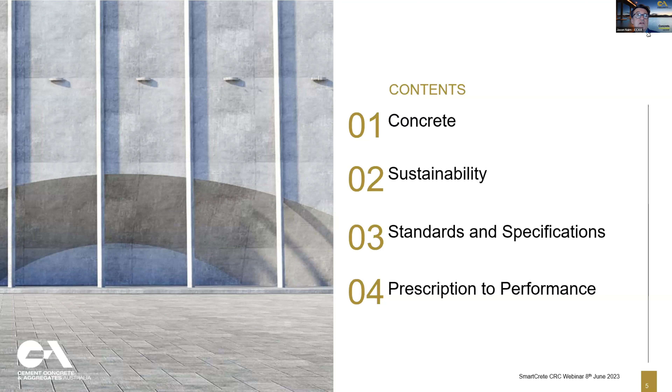So a quick chat about concrete - what is concrete, why are we interested in concrete from a sustainability point of view as well. A bit about the two key areas of interest for us in sustainability, which is circular economy and decarbonisation - two major ones. Let's talk about standard specifications - what's performance-based, what's prescriptive, and how do the two work together to form hybrids. Then a bit of a discussion about, from a concrete point of view, if we're going to provide performance-based alternatives into prescriptive specifications, what are the areas of interest. We're not going to come up with the research projects here or exactly the answers - it's really an awareness session about the specifications and standards and how they apply to concrete.

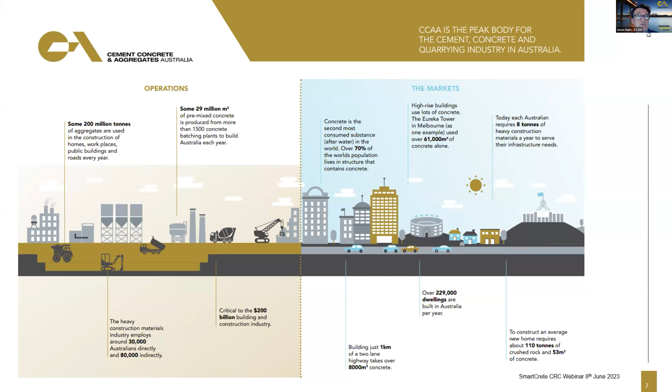All right, concrete - so our favourite material, it is the most popular, by volume at least, construction material used in the world. Around 29 million cubes used in premix concrete, at least in Australia, from around 1,500 batch plants. It's about 70 million tonnes of material, 10 million tonnes of cement, 55 million tonnes of aggregates, 3 million tonnes of SCMs, and a little bit of water to mix it all together.

As a result, we do use a lot of these materials. There's a really important focus on sustainability to ensure that we're using those resources efficiently and that we are minimising any of the impacts of extracting and using those resources.

The two areas of interest really for us - and I think you'd have to be living under a rock at the moment not to hear about circular economy or decarbonisation. From a circular economy point of view, we're very fortunate in our industry that while we do extract and use a lot of materials, we're not large waste generators. Nearly everything we take out, we use in making concrete, and somewhat we're a net consumer of waste from other industries. For example, we use about 3 million or so tonnes per year of supplementary cementitious materials that come from blast furnace waste products from iron blast furnaces or from coal burning power stations.

In a concrete plant, when we come back and wash the concrete trucks out, we capture that water and recycle it for making new concrete. From a quarry point of view, we take the quarry fines that would otherwise not have a market and transform that to produce manufactured fine aggregates or manufactured sand to replace otherwise natural sands. We also bring in a lot of aggregates from other industries such as air-cooled blast furnace slag, and there's a huge growing list of otherwise waste streams such as recycled crushed glass, where that glass can't be used to make new bottles - which is the real value - to be used as a replacement again for natural or manufactured sand.

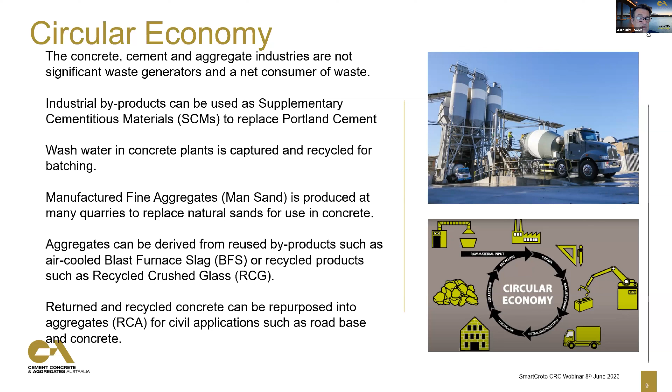But also concrete is 100% recyclable. We can reuse concrete at the end of its life to either make new concrete or to use in civil applications. So it is a great opportunity to improve that circular economy, and research and working with specifications and standards is the way to ensure that we're using these materials as best as possible, but with the lowest risk as well.

There's a lot of waste materials that are used, really supported by end-of-waste codes or resource recovery codes in New South Wales, supported by standards and specifications, including testing and guides and handbooks. There's been a lot of work over many years to encourage the use of waste materials to replace virgin materials, and that continues now.

For example, Austroads have undertaken work recently around recycled crushed glass. They produced a guide for how you process glass fines to produce an RCG, or recycled crushed glass, suitable for construction use and a range of applications. They've also got a specification that tells you the quality requirements for the RCG to be used in different applications. Once you have those things, you know how to make it, you know what you've made, and you've got a guideline for consistency.

These specifications provide consistency. You can then undertake desktop, lab and field trials to develop and demonstrate the use, and finally make sure those materials are incorporated into our standards and specifications. Again, it's all performance-based. If you've got RCG as an alternative aggregate and a performance-based standard for making concrete, then the thing works really well together.

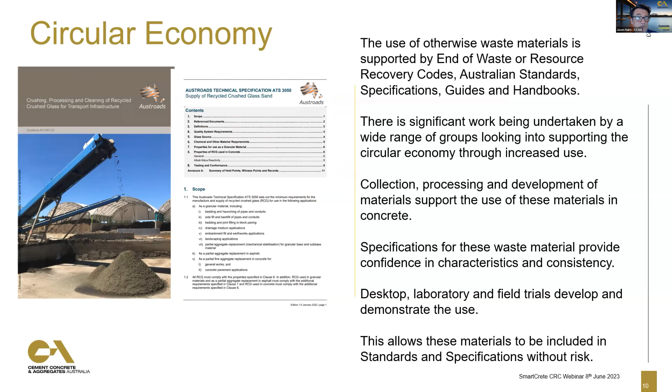The other area of interest for our industry is decarbonisation. People should know that the cement and concrete industry is responsible for a large percentage of anthropogenic CO2 emissions, and we've got a very strong ambition to reduce that CO2 footprint as quickly as possible, with a target of net zero by 2050.

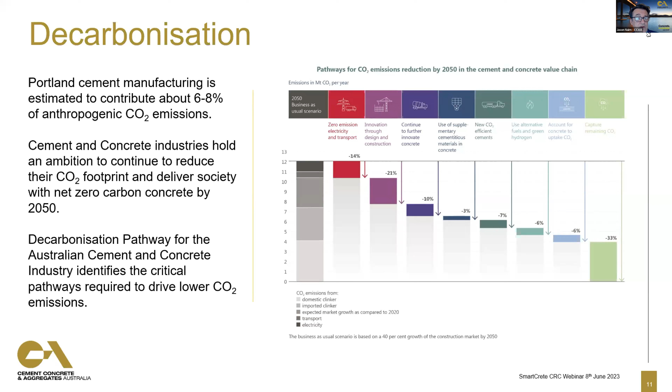As a result, there was a pathways document, Decarbonisation Pathways for the Australian Cement and Concrete Industry, produced at the end of 2021 in combination with Smartcrete, CIF, ourselves and others. That comes up with 8 pathways which all work together in parallel to get to net zero by 2050.

From a concrete manufacture, supply and use point of view, there are really only 4 pathways that act in this area. The other ones are about making clinker or electricity use, and about carbonation. These 4 are about the way we design and construct things, the way we make the concrete, and the materials we use, the SCMs and cements inside those concretes.

Together those 4 pathways give about a 41% reduction of CO2 at the 2050 position, but will continuously progress from now to that 41%. When you look at those pathways, there are a lot of individual things happening in design method, structural optimisation, using less materials, and changing the way we assess and test the concrete product.

We're going from 28 days to, say, 56 days where appropriate. Changing the construction technologies to use things like going from cast-in-situ to precast, or from pumped concrete to another way of delivering concrete.

Reducing waste is important. Extending the life of the structures is important. Repairing those structures, reusing those structures, and then all the things about the cement.

So you're looking at maximising traditional use of SCMs, but also looking at the new ones available, looking at reducing cement content, new alternative binders, both non-Portland cement ones and some new CO2-efficient cements. These are the things in those 4 areas, or a shortlist at least, that all rely upon changes to specifications and standards to enable them to be delivered.

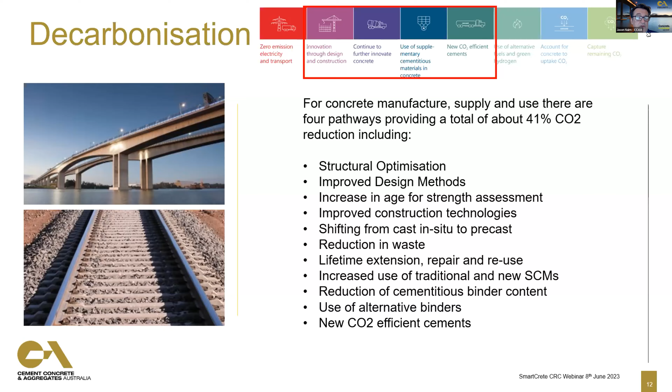So everybody knows concrete - it's very durable, very strong, very energy efficient, low cost. That's why we use a lot of it. And our structures are typically designed for a long life, 50 to 100 years.

But the standards and specifications we have are really important to make sure our design requirements, the structures we make, meet all the in-service requirements and last for this long design life, the long service life. But there are opportunities in the standards and specs to further support the circular economy and support decarbonisation as well.

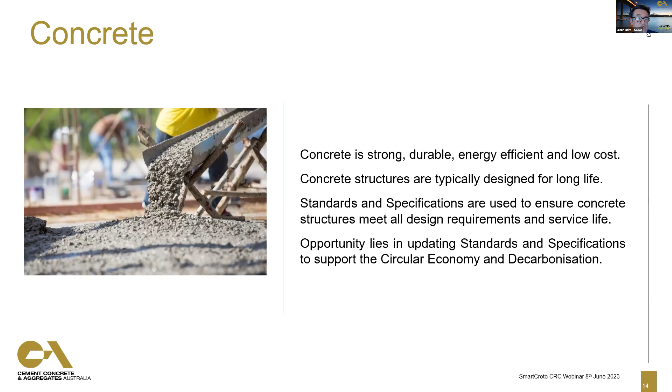When we look at standards and specs from a concrete point of view, these provide requirements for raw materials, about the mix designs, what proportions of these materials you need in those concrete designs, about the concrete properties you want, plastic and hardened properties, the methods of construction, and overlying all of these things is the testing as well.

Standards are also supported by specifications and codes. For instance, the National Construction Code is fully supported by a set of design standards, which is supported by a set of material standards, which is supported by a set of testing standards.

Standards and specs can be prescriptive, where they say this is exactly how you do it, or they can be performance-based, where they say this is what we want at the end and it's up to you to decide how to deliver that. But in reality, all standards and specs are somewhat hybrid - they all have a little bit of prescriptive and a little performance, and the balance can change depending on which standard or spec you're talking about.

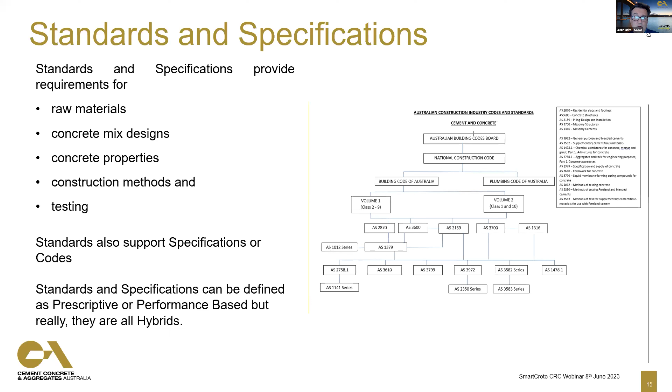Prescriptive specifications from a concrete point of view are really intended to deliver the required performance. These are typically based on history or experience and knowledge, and they do limit or specify the types of materials that can be used.

That can be a limitation in regards to looking at new recycled material sources. They can limit the proportions of the materials in the concrete mixes, and that can set minimum cement contents and therefore have an effect on our strategies to decarbonise. They can set plastic properties of the concrete, slump or slump flow ranges, air contents. You can have test methods that are in there, and also the final properties.

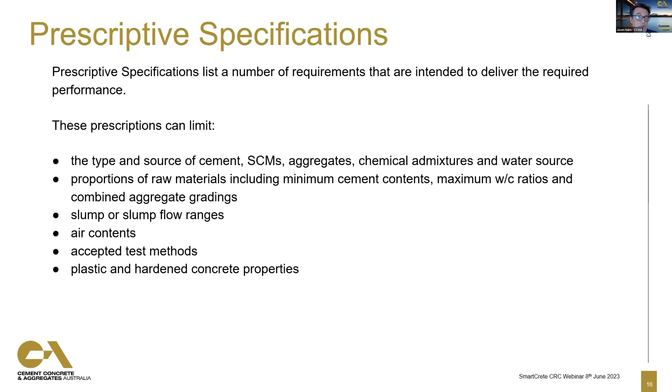Performance-based specifications, on the other hand, really are focused on the important properties of the concrete, both in the plastic and hardened stage, that are required to ensure that the structure being built is going to meet its service and design life requirements. The benefits really are that it can be more sustainable.

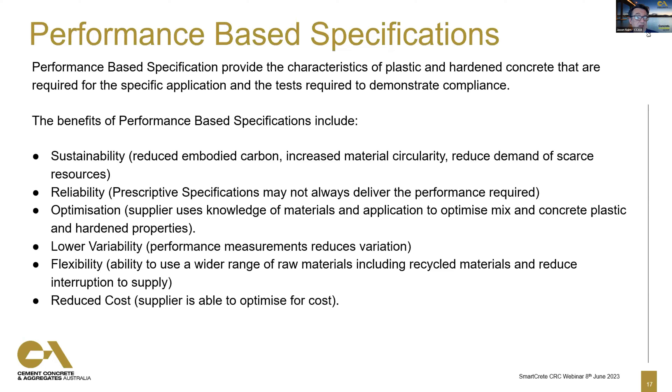But with each of these two distinct types of specifications, there are advantages and disadvantages of both. From a prescriptive specification point of view, the advantages are really about control and confidence. They're simple, they manage risk, and you don't need a lot of expertise to deliver to a prescriptive specification. If a specifier says I need this much cement in my concrete, you make a concrete with that much cement that meets the other test requirements, and that's straightforward.

But the disadvantages are that it does diminish the ability to optimize those mixes. It diminishes the ability to include new materials. It doesn't stop it, it just diminishes it - it just slows it down a little bit.

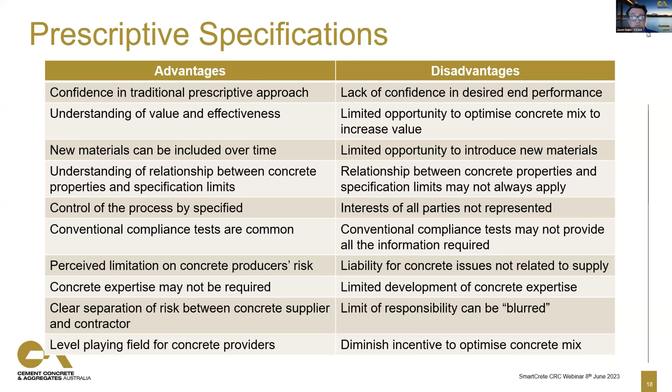Performance-based specifications, though, also have a number of advantages and disadvantages. Again, they're about control and about the opportunity. Another advantage is the testing requirements, but also it's more complex - that's a disadvantage. There's a lot more work required in a performance-based specification to demonstrate that the concrete being delivered and used actually meets the final requirements.

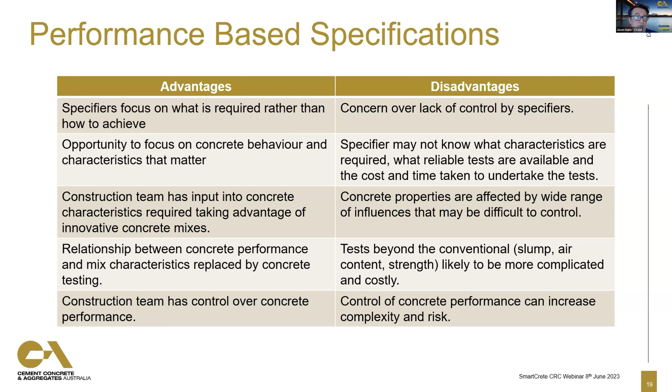As a result, there is a lot of research and other work that needs to be undertaken collaboratively between the whole value chain to ensure that performance-based specifications are accurate, well supported, and reliable. The tests we undertake, which are different to the normal tests and may be more complex, need to be done accurately and reliably, so that you actually have control of that concrete performance via that performance-based specification.

But in reality, because there are advantages and disadvantages of both types of specifications, it's hybrid specifications that are most commonly used. For example, if you look at AS 1379, the manufacture and supply of concrete standard, this one does have some prescriptive requirements - it does say these are the materials you should use to make concrete to meet this standard, but it doesn't specify how much cement, for instance, you need to use to produce a certain concrete grade or certain concrete strength. What it does tell you is how do you sample it, how do you test it, and how do you assess those results to ensure that you're meeting that concrete grade.

But most specifications are a bit more conservative in that regard, and they have additional requirements such as minimum cement contents needed for a certain concrete grade, really about controlling durability. But there are lots of specifications as well that are also hybrid - here's an example from B80 from Transport New South Wales.

When we're looking at expansion of aggregates in this alkali-aggregate reaction, if you measure the aggregate under these AMBT and CPT tests, and you get a certain expansion, then there are some actions required - some deemed to satisfy actions to control that expansion, in particular use of SCMs.

But at the same time, in that specification, under certain conditions, you can use those same tests and work out how much SCM you want to use, fly ash or slag in this case, to reduce those expansions below the level that's acceptable for concrete use. So that's a really good example of a hybrid.

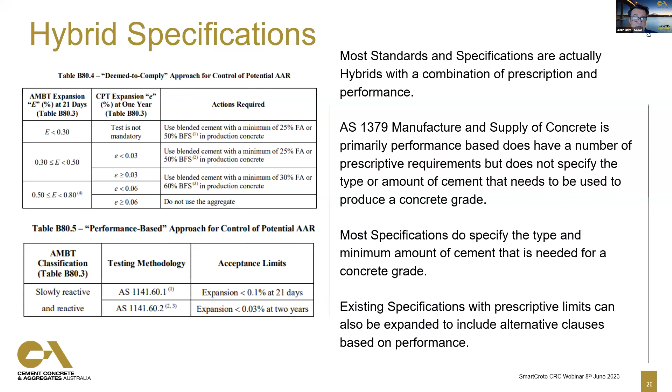So how do we go from prescription to performance? Really, it's about adding performance to prescriptive specifications rather than changing from one to the other.

From a concrete point of view, there are really a number of key criteria. It's got to be structurally safe, so we're interested in the hardened properties of the concrete. It's got to be able to be constructed, so we're interested in the plastic properties of the concrete. It's got to be durable, so we're interested in the durability of that hardened concrete. And it's got to be sustainable.

We do the first two, structural safety and constructability requirements, in specifications and standards right now. We do have some specifications and standards that talk about durability, and we're starting to see circularity index and certainly upfront or embodied carbon come into the requirements for concrete supply as well.

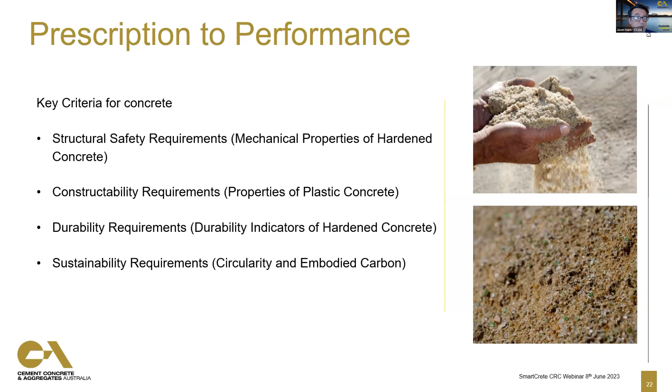From a structural and constructability specification point of view, we have some very simple tests that we do in regards to the hardened concrete, typically strength, which can be used to predict other properties such as stiffness, modulus, flexural strength or shrinkage or otherwise. It's a very simple test, typically tested at 28 days.

There's an opportunity to change that test date, to change it to a later date, take advantage of maybe 56 days where it's appropriate, and take advantage of the strength gain we get past 28 days that doesn't occur that much with straight cement mixes, but occurs highly with SCM mixes.

Constructability is normally specified by a placement method and then an appropriate slump or slump flow. And again, on a performance basis, what we're looking for there is to make sure the concrete is compacted. So maybe we could have a degree of compaction specified instead of those other requirements, not the compaction factor test itself.

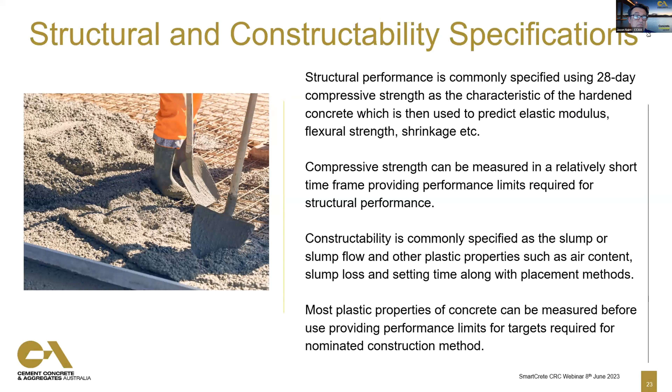But really, the big opportunity is in durability. It is in durability that prescriptive specifications are probably more popular. And in durability, we really talk about three ways that we control durability of concrete. We have avoidance - we have rules about don't do this, this, and this - and these mechanisms of concrete degrading won't occur.

We then have deemed-to-satisfy rules like cover, reinforcement cover, and minimum concrete strength requirements. And then we move to things like service life models, probabilistic or partial safety factor service life models.

Avoidance and deemed-to-satisfy are really common in specifications and standards because the service life models do require a more thorough understanding. It's more complex. You need to have a durability indicator test, a service life model you have confidence with, and you need to understand the mathematics to ensure that you get the reliability you're looking for.

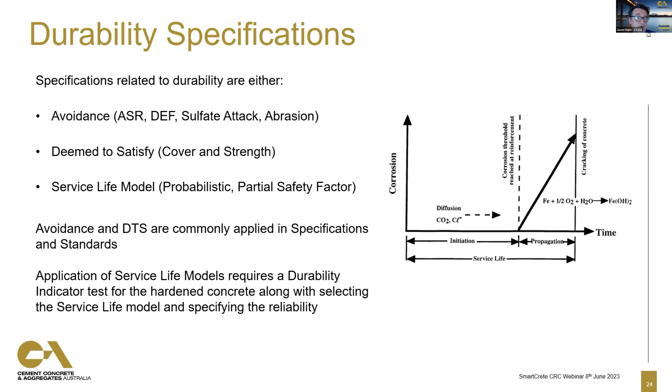But there's plenty of service life models that are published around the world and being used. The FIB have in Bulletin 34 in the model code a good example of that, and that model code is about to be updated this year.

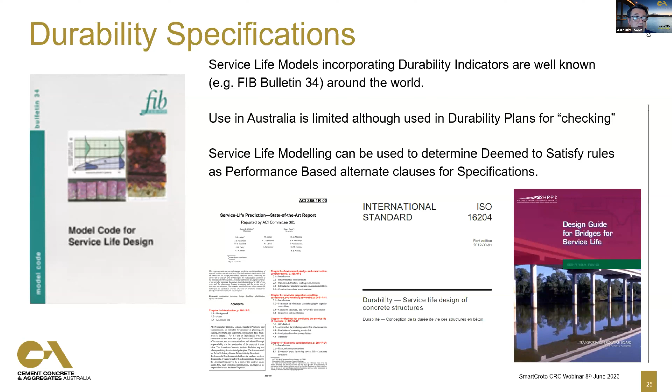We do use service life models in our durability plans for large structures for checking or providing additional advice. And also service life modeling can be used to check things like deemed-to-satisfy or avoidance rules to make sure those rules work. So they have a lot of value, these service life models.

Key to it, though, really is the test methods, the durability indicators. So from a durability specification point of view, we really need to understand what durability we're talking about. Is it exposed to CO2 and therefore carbonation, or is it exposed to seawater and therefore chlorides? Given that, what sort of accelerated test methods?

We're not going to do a test method where, if we're going to have a 100-year design life, we wait for 100 years to see if this is going to work. We've got to have methods that are accelerated but still reflect what's really happening in real life, just giving us the result a little bit quicker, or a lot quicker.

We have to have service life models that we have reliability in, that are mathematically correct and have been proven in real life environments, and that we've got confidence in the reliability factors we use. We also need to understand, are we talking about durability specs for quality assurance against quality control? And given all those things, how do we include it into a specification to provide this performance-based alternative?

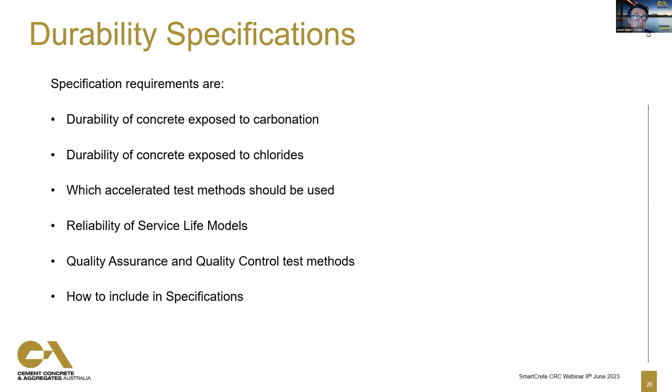These are all areas of thought for research. And finally, what are the opportunities? Well, the opportunity is performance-based construction, supporting circular economy and decarbonisation.

There's a bit of a laundry list of things you can think about: increasing the age of strength assessment from 28 days to 56 days where appropriate, where you're not going to load that structure early. Looking at limits of concrete shrinkage and making sure they're applied where you need those limits, where otherwise the structure will have cracking or shrinkage that's not acceptable.

Opportunity to use more recycled materials from different streams, increase the use of traditional SCMs and introduce the use of new SCMs, reduce cement contents where possible, and have the ability to use alternative binders, including these new CO2 efficient cements such as LC3s and things like that.

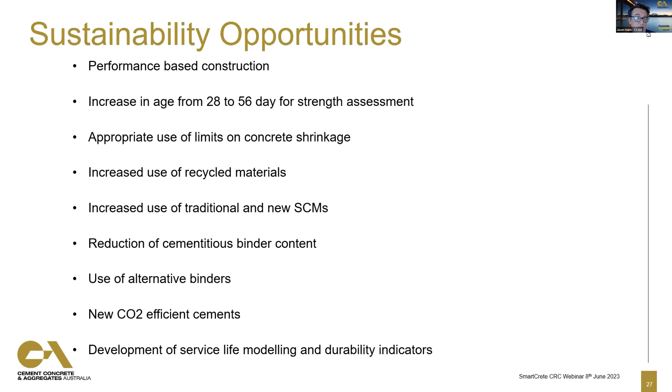But one of the things that underpins this for durability, a lot of these things will rely on service life modelling and the determination of the appropriate durability indicators to measure the characteristics of that concrete.

Thanks. Back to you, Claire. Oh no, back to Menti. No. Thanks, Jason, that was fabulous, really, really great overview. And yes, we're going to go back to Menti.

I will just stop my sharing screen. So after that fabulous overview from Jason, our question is, why should or shouldn't we adopt performance-based specifications for concrete?

Thank you, Claire. Okay, so yeah, just flick the second slide. That's fine, there you go. You should have control of that too. Thanks, Bruce. Oh, me, have I got control? No, just flick the second slide, Claire, please. I'll do it, let me just. That one? Okay, okay, thanks very much for the opportunity to come and talk to you.

I'm going to just focus for 5 minutes or so on some of the test methods for assessing the durability of concrete. Jason touched very eloquently on the need for test methods to essentially supplement and support performance-based specifications. But it's not as simple as that, I'm afraid. As you'll see in the next few minutes, some of these test methods do have some limitations which really need to be addressed in the performance-based specification.

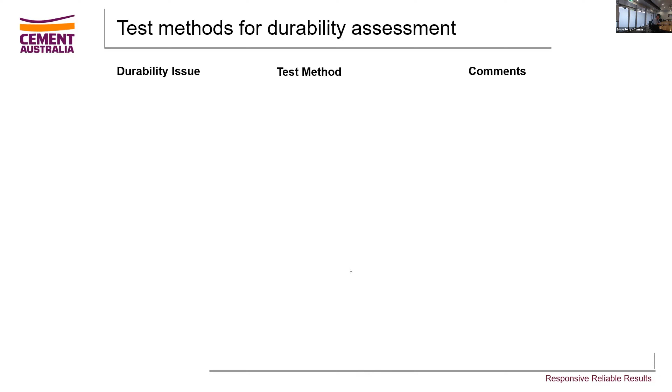So the first one, okay, alkali aggregate reactivity. We're all very, very familiar with this phenomenon, not least of which up here in Queensland, where the infrastructure organisation has suffered hugely from a lot of support structures suffering from expansive reactions. The two test methods available today, AS 1141, 60.1 and 60.2, are designed to allow aggregates to be tested for potential reactivity under alkaline conditions, which is in concrete.

The accelerated mortar bar test is well established, as we all know. It can be carried out by numerous NATA accredited laboratories around the country. But the downside really is that this is an accelerated test. The concrete prism test is also an accelerated test, but it takes a lot longer to run to completion. I put there 2 years, but certainly within the first 18 months or so you'll know whether you're going to be on track for a successful result.

So alkali aggregate reactivity is a durability issue, but it's fairly well established to be able to assess a particular source of aggregate's potential for causing expansive reactions. Next.

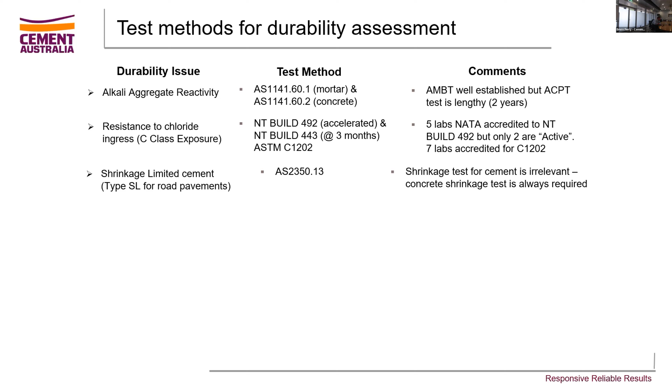It puts constraints on cement producers to produce economic general purpose cements, because at the end of the day the concrete always has to pass the shrinkage test. It's not the cement that has to pass the shrinkage test, it's the concrete mix in question that has to pass the shrinkage test. Which brings me on to the next test.

Claire, can you move on? Thank you. Concrete drying shrinkage - this is another accelerated test, primarily aimed at concrete mixes used for pavements, floors, slabs, etc., and also containment structures, water retaining structures, even radiation containment structures. This is an accelerated test that's well documented in AS 1012 Part 13, but the test has a lot of limitations.

Not least of which is the fact that the results you get in the accelerated laboratory test really bear little resemblance to how a concrete element will perform in the field. Work done here in Queensland by Professor Peter Dux and Allan Carse proved this years ago, that shrinkage numbers in a laboratory test do not correlate to how a concrete floor or element will perform in the environment. So again, when we talk about performance specifications, the test method really has to be relevant to what happens in situ.

Okay, moving on. Another quite topical subject at the moment is the resistance of concrete to carbonation. Now why is this a problem? Because there is a school of thought that says concrete mixes with higher levels of supplementary cementitious materials, i.e. low carbon concrete mixes, are more prone to carbonation over a period of time.

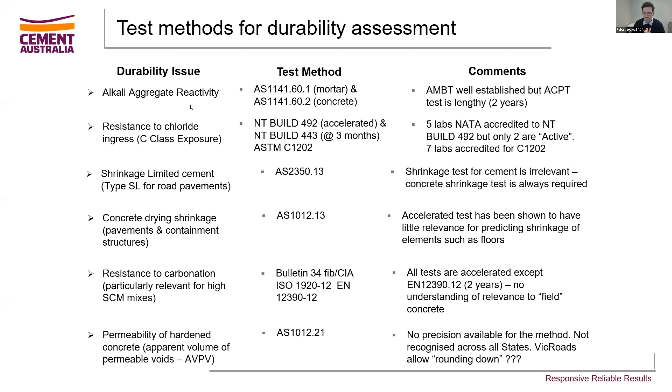Thanks, Claire. Afternoon all. Thanks for the invitation to speak to you today about this. It's a topic, well, the prescriptive specifications part of it, or the performance-based specifications, is a topic very close to our heart at ACA. This won't be a technical conversation. I still struggle with the difference between concrete and cement, so forgive me for that.

Let me first introduce ACA. For those of you who don't know us, we represent the largest tier 1 construction companies in Australia. So all the big infrastructure builders are our members. Our job at ACA is to represent their interests and promote a more sustainable industry in the fullest sense of that word.

Prescriptive specifications, or specifications in general, are quite problematic in many respects from a contractor's point of view. It's pretty obvious to all of us that they largely determine what gets built and how things get built. People often look at contractors and say things like, why aren't you innovating? Why aren't you doing things differently? Why aren't you being more productive? And the response from a contractor might quite rightly be...

Well, it's pretty hard to innovate when you're handed a fully resolved design from a consultant, with all due respect, and the client's attached a fixed price lump sum contract to that design, and they've said, go and build that. And that design, of course, is fully resolved to the last nut and bolt. In that sort of framework with very, very prescriptive specifications, it's extremely difficult for a contractor to have any influence on the ultimate design outcome or constructability even.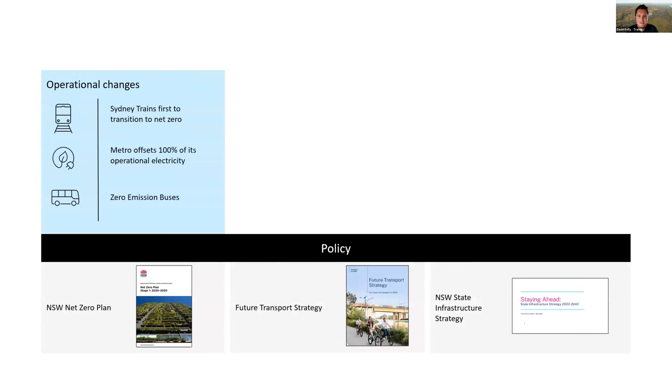Yeah, and one more. Fantastic.

Just to set some context quickly: we've got the New South Wales Net Zero Plan, our future transport strategy, and recommendation 27 in the state infrastructure strategy. We've been doing a lot of work in the operations space - Sydney Trains was the first to transition to net zero, and Metro offset 100% of its operational electricity. But two years ago, we realised we needed to change in terms of construction-related emissions and also circular economy. We set up Sustainable Procurement in Infrastructure, and last year delivered a discussion paper, offered a formal response to industry, held 5 targeted workshops, and released an industry engagement report, which will be sent out at the end of the webinar.

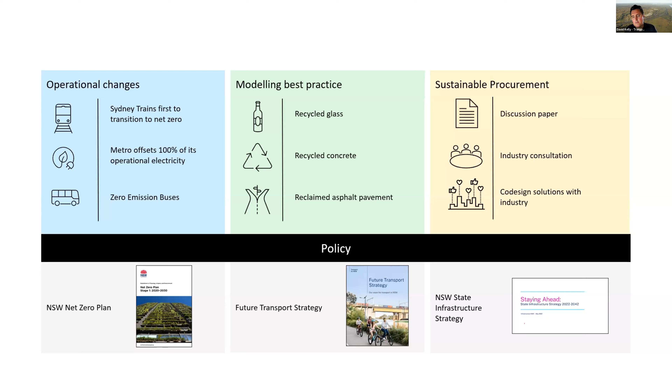I'll briefly touch on industry engagement before talking about our journey to performance-based specifications for decarbonisation.

So Sustainable Procurement in Infrastructure - it's been almost 2 years now. It's a 2-pillar approach. We've got an accelerated pilot program, which has set consistent project level emission reduction targets, with M1 to Raymond Terrace behind me being one of those. We've also piloted performance-based specifications for decarbonisation, done in consultation with the Cement Concrete and Aggregates Australia - a quite handy pilot to inform our approach. At the same time, we've got one of the largest industry engagement campaigns for a corporate document at Transport.

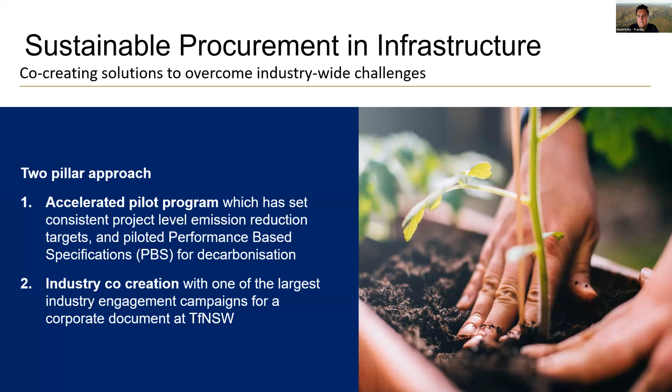Our co-creation workshops brought industry leaders in for 5 targeted sessions. One was on baseline sustainability requirements. The second was our roadmap to net zero infrastructure, plotting out discrete milestones out to 2030, 2040 and 2050. We also looked at designing for decarbonisation - we talk about low carbon materials a lot, but not enough about low carbon assets, and low carbon materials and assets are poorly correlated. We did a whole workshop on standards and specifications as a barrier, how we're moving to more performance-based specifications, and then also on capability, which was probably one of the biggest challenges.

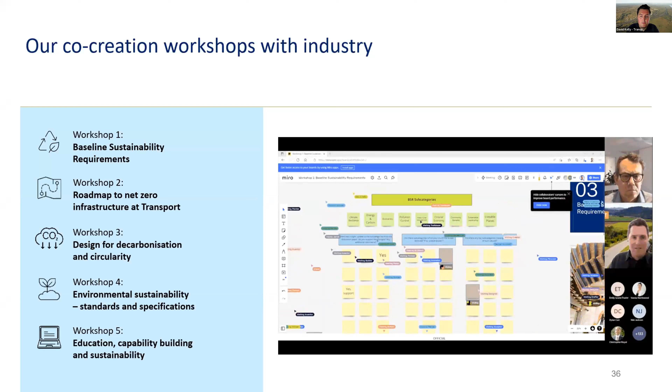As I mentioned, the report will go out, but there were 4 key themes raised. I'll only focus today on materials and design, and standards and specifications, but I urge you to read the report and the associated 2026 Decarbonising Infrastructure Delivery Roadmap with Infrastructure New South Wales.

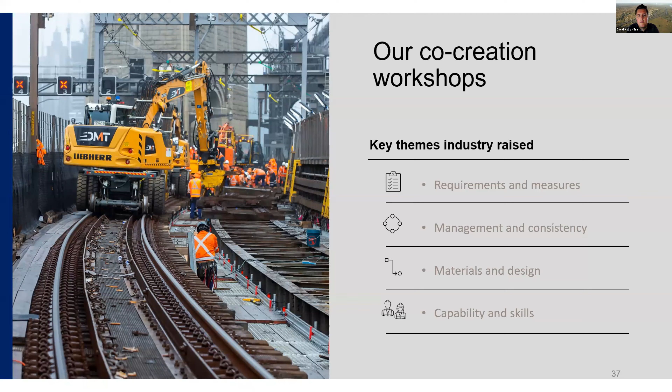So what's the challenge here in moving to performance-based specifications for decarbonising infrastructure? The first is around carbon management. We've seen leaders such as High Speed 2 at the program level and National Highways at the portfolio level move to certified carbon management systems. The need here is to talk about carbon management, not just quantification or assessment, as it's referred to.

We've made a public commitment after those workshops to move our entire portfolio to a certified carbon management system, set out in the 2026 Decarbonising Infrastructure Delivery Roadmap. We asked Tier 1, 2 and 3 contractors when they'd be ready to move to a certified carbon management system. Our Tier 1s, very ambitious, said 2024, Tier 2 said 2025, and Tier 3 wasn't until 2027. So we've chosen an indicative date of 2026 for all our contractors and associated supply chain to move to a certified carbon management system - but not before Transport gets its own house in order and does that first.

PAS 2080 is quite impressive because it sets out requirements for the whole value chain. So as Robert mentioned, what are the asset owners and managers doing? Part of the obligations under PAS 2080 is to make sure we're being clear and transparent about target setting, baseline, leadership, and how we quantify.

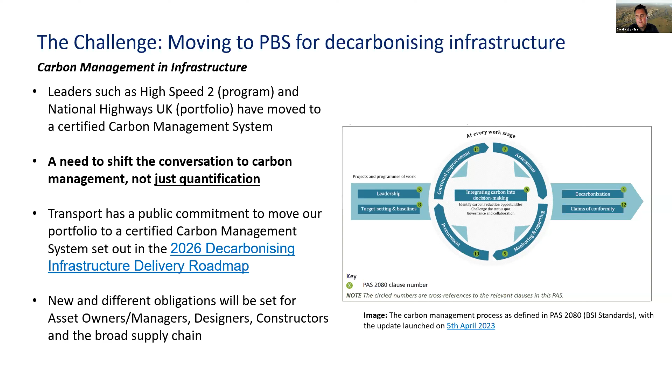I mentioned quantification - it's just one component of carbon management. I think industry should be applauded for taking the lead in utilising digital sustainability tools. But as a result, we've got challenges in consistency and assurance to inform robust and transparent whole life carbon. There's virtually a new carbon tool coming on the market every week, and as you can imagine, sitting in an asset owner and manager's position trying to put emission reduction targets on projects, this is really, really challenging.

Under Sustainable Procurement in Infrastructure, particularly our pilots, we're starting to form up what that assured approach looks like. A great case study showing some of the challenges is High Speed 2 Euston Station - they did a side-by-side comparison with two market-leading tools, and just for a C40 and C50 class concrete with 20% ground granulated blast furnace slag, there was a 59% difference in the emissions factors. So huge challenges.

If you can imagine, if we're on a project and we've put an emissions reduction target on without changing any of the design, a contractor could potentially beat that emission reduction target. So it's about working with our industry partners to find this assured approach. We have a priority action in that industry engagement report, and that's to create a solution for consistent and assured LCA and carbon footprinting. That will be updated in our digital engineering framework.

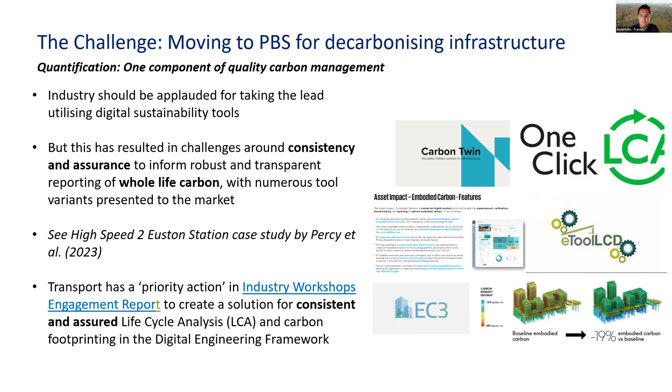The last thing we want to do is stifle innovation, as Robert mentioned. Our Tier 1s, they're pushing the boundary, they want to be more efficient, and we definitely don't want to stifle that.

Transport's moved to performance-based specification for decarbonising infrastructure. As Jason put it, we're adding more performance to hybrid specifications in most cases. We've launched the 2026 Decarbonising Infrastructure Delivery Roadmap with Infrastructure New South Wales. It sets out a clear path for transport and our industry partners to 2026. We're in the process of rolling out that sustainable procurement framework, including minimum emission reduction targets on all of our projects, beginning now on the back of extensive piloting.

We're developing guidance for early market engagement. As Robert mentioned, we need to start thinking about this differently across both our core and complex delivery models, and also how we're designing. Most importantly, continue to work with our industry partners.

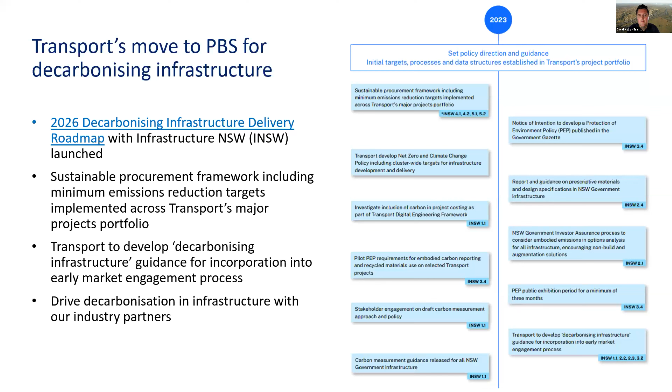So where does carbon sit? Does it sit with a sustainability professional and we try to bolt it onto all of our standards and specifications? In my opinion, it sits with project performance alongside cost, schedule, risk, and other functions in project performance. That's the approach we're moving to.

Moving to carbon cost management, we have an international partner that we're doing this with. What we're looking to do is link cost, carbon, and engineering design, and have base carbon built up to PAS 2080. This is going to give that assured approach about what really is a decarbonised solution. We're going to get contractors to produce quantified decarbonisation plans the same way they produce cost plans, using assured lower carbon alternatives. It's a really exciting project and quite progressive in the Australian infrastructure sector.

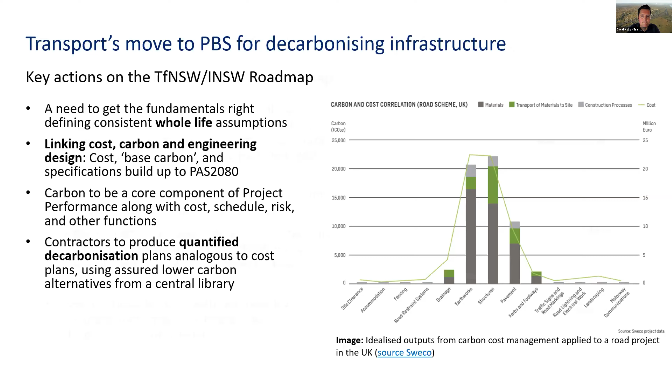So what are the key actions on this roadmap? The first is that we're assigning whole life-based carbon at an item level, so specification level, and then a resource level underneath, as I mentioned with High Speed 2 before, and some of the complexities underneath specifications. Think of our core specifications like R53, B80 in the concrete space, R82, R83. Then we'll also be setting carbon intensity thresholds that form the basis for our performance-based approach to net zero.

Probably to Robert's point, which is key, is that this will take incentivization, and we've heard that loud and clear through our industry engagement with sustainable procurement and infrastructure. After we deliver that robust and assured whole life carbon management system, similar to National Highways, we've got a public commitment to incentivize lower carbon and circularity outcomes on projects. I'm not sure if we're the first infrastructure agency in Australia, but we do have that public commitment there to start to incentivize, to turn the dial.

That's about it for me. But I think the key here is to continue to work with our industry partners, the Cement Concrete and Aggregates Australia, and of course Smartcrete CRC, because there's huge technical challenges here. In my opinion, there's really probably inadequate funding for the amount of accelerated research and development that we need to do to move to that perfect balance between prescriptive and performance - a really nice hybrid approach for standards and specifications.

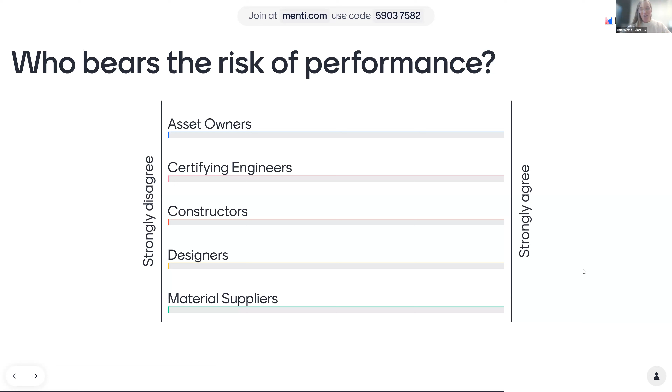Fantastic, we're starting to see those little dots jiggle about. Yeah, fascinating.

So I think what we've heard by listening from everyone across the supply chain today, from the material suppliers through to the constructors through to the asset owners, is really this is a shared responsibility, and it's something that we have to work collaboratively to deliver. So that's fabulous insight there.

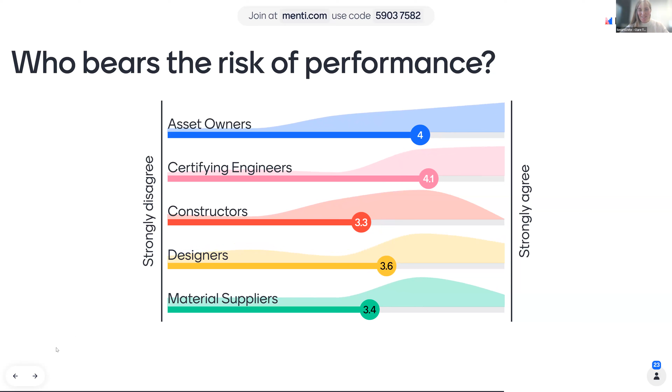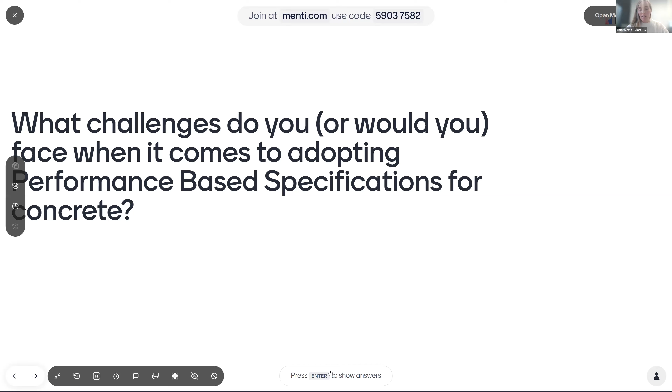Thank you so much. And finally, last question, which I'll pop up very quickly: what do you see as the challenges towards adopting performance-based specifications? Again, this is a card exercise, so you can write full sentences. We might leave this one running in the background, so please feel free to pop in anything you like, and it will automatically go into the system. And I'm going to hand over to Hugh from Smartcrete, who is going to go through the questions.